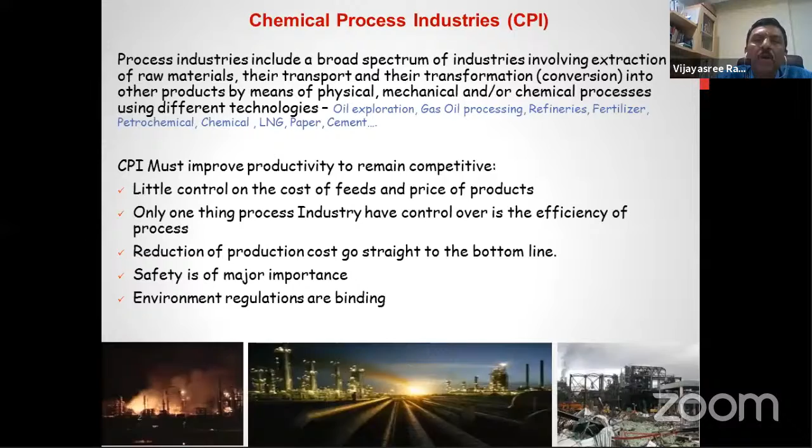Now, the challenges with the management of this kind of chemical process industry are multiple. The chemical plants are becoming more and more complex, especially because of the technology advancements. Basic technology advancements like catalyst development and plant design are improving day by day.

Besides that, automation, as you know, has tremendously grown over a period of time due to the advent of computer technology. Automation is quite directly related to computer advancements. So because of the advancements in computer technology, automation has become very, very complex now.

As you know, even home appliances, like say a washing machine, what you bought 10 years back and today is quite different. There are more options now, more sophistication, and more trip systems are involved in home appliances also.

So in a big plant or a chemical process industry, the complexity due to automation and safety systems has become very, very high. Because of that, the plant has become more complex. This is one big challenge.

The companies also bring new processes, new technologies and products to the market very, very quickly. The changes are very rapid today. If you don't change yourself, you become obsolete and you are out of the market. So you have to keep upgrading yourself all the time and also produce new products as per the demand of the market. So this is the current situation.

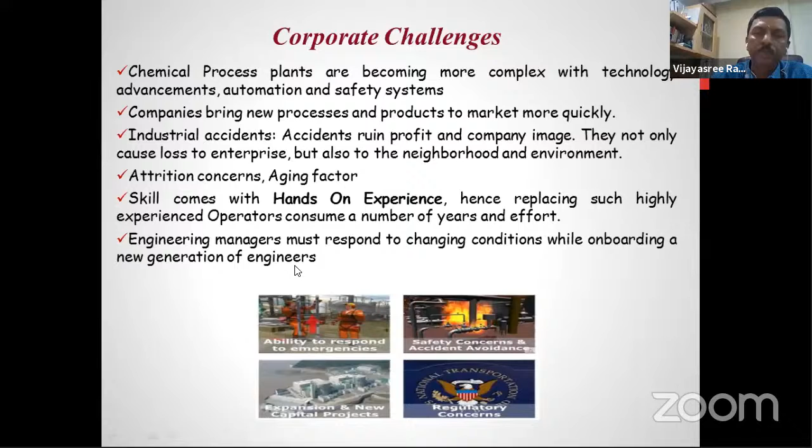And obviously, when there are challenges, you also have an opportunity. So let us see what can be done. Here really comes the analytical capability, analytical techniques like simulation, which can be very much used to address many such challenges, problems and issues that you face in a chemical process industry. So our topic will be about simulation.

Okay, now let me just define what is a simulation. You might already know about it, but just for the sake of continuity. So simulation is basically an imitation of the real world, real equipment or a real plant. That is called simulation. So it's basically used to design, develop, analyze, and optimize technical processes such as chemical plant processes, environmental systems, power stations, and so on. So it has got a lot of applications.

A simple example for simulation is a video game. All of us are familiar with the video game, motorbike, car. We keep playing all the time. So it's basically a simulation of the real equipment. It's not an actual plane, actual car, or actual motorbike. It's just a software which replicates some behavior of that particular process. That's all. But it's very interesting and useful either for entertainment or education.

So if it is a flight simulator, it has got a lot of value because you can teach the pilots how to operate the plane properly, how to start, take off, how to land, how to handle emergency. So it has got a lot of value. If it is a video game, it's entertainment value. So it is not exactly the plant or the car or the motorbike. It is just a simple representation of that particular equipment in a simplified manner. But still, it is quite useful to us.

But in our context, the simulation model is the same. It is only the software which represents a particular plant or a process. So that is basically the simulation model. We will define more detail about the simulation model in the subsequent slide. So we can categorize simulation into three types mainly.

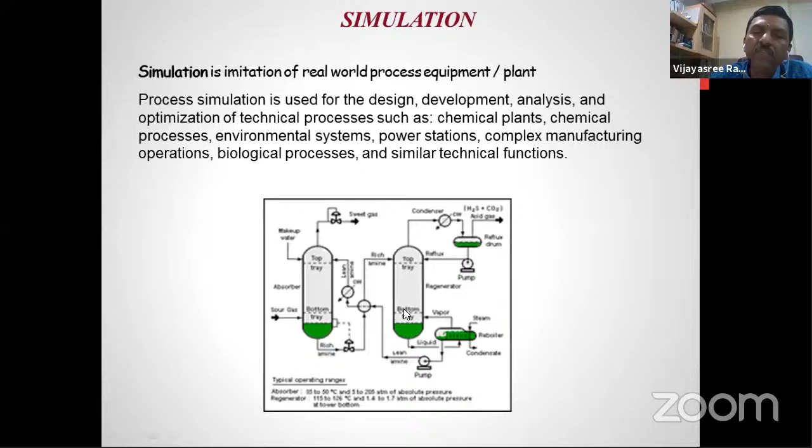Streams are pipelines. So if you see here, there are multiple equipment. There is the distillation column. There are heat exchangers. Again, there is a distillation column. Then there is a reboiler. There is an accumulator in the top and so on. And all these are streams which are connecting the various equipment. Basically, steady state simulation is a representation of this situation.

And this simulation is ultimately a software which is solving the mass and energy balance coupled with the phase equilibrium and transport and chemical reaction kinetics of a system. That's basically the simulation model. We will see a little more detail about this mass balance and all that in our next slide.

So for steady state simulation, you would already be knowing the names Aspen, HYSYS. Some of you would have already used them in your college or you would have heard about this terminology. There are other software like ChemCAD, DWSim. There are many steady state simulation software widely used in the market by industry as well as by academic institutes.

Okay, now again, this steady state simulation has got a lot of applications, but it's not everything. Steady state simulation has some limitations, and therefore we need a better methodology of simulation, which we call dynamic simulation. So dynamic simulation is an extension of the steady state simulator, an advanced activity that integrates in the same environment design, operation, and control. Benefits include predicting design limitations over a wide range of operating envelope, overall validation of design performance, operability and safety.

Basically, dynamic simulation, as the name suggests, is dynamic in nature. Steady state, as the name suggests, is steady in nature. That means the steady state simulation will give a result when the system becomes steady. For example, if I have a distillation column, I put some feed into it, I'll get product. But this product you will not get instantaneously. It will take quite a long time. It has to fill up all the trays in the distillation column. Finally, it has to come out as top product and bottom product. It will take time. So time is a very, very important aspect.

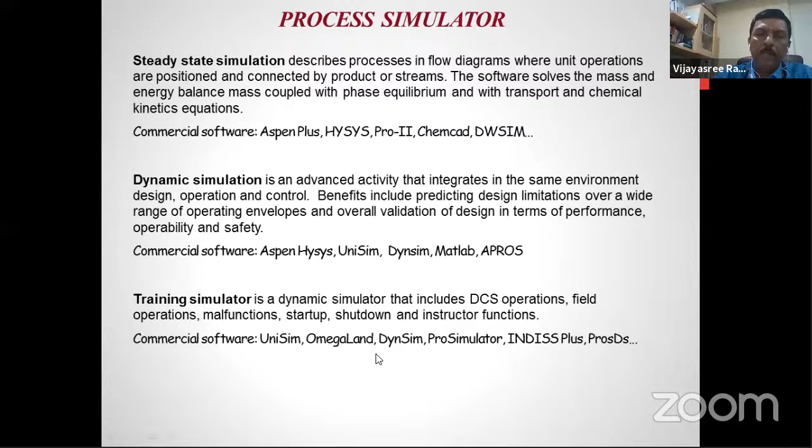Okay, now if you take a plant, you go to a refinery or a gas plant or a fertilizer plant, there are many activities happening in the plant. Now, when I want to construct a new refinery or a new fertilizer plant or a new LNG plant, anything new, initially you have to design. That's the first activity. In design, there are multiple stages, 3 stages of design. The first stage is conceptual design.

Suppose I want to build a new refinery. Today, CPCL is going to build a new refinery at Nagapattinam, I think a 9 million ton refinery. Right now it is at the conceptual stage. Conceptual stage means I know what products are demanded by my market, and I know what crude I'm going to process. Now I have to come out with the overall configuration of the refinery. What are the plants I will have in my refinery? What is the capacity of each plant? That is the overall conceptual design I have to first do.

This conceptual design will be the first step, where you find the optimal design through fast evaluation of design alternatives with flexible specification and continuous solving, based on the product demand and feed availability. If I am designing a refinery in a very cold region, let's say Kashmir, the design will be different. If I'm putting it in a very hot place, maybe Chennai, the design will be different. So based on the ambient temperature, availability of raw material, feedstock, and product demand, this broad conceptual design will be done by the technology licensors.

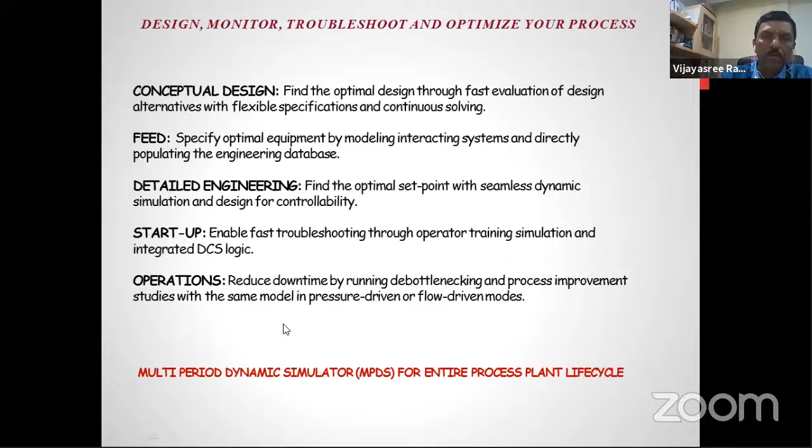The dynamic simulation we will talk about is a multi-period dynamic simulator, and we use a simulator for all these aspects of the plant requirement. We use steady state simulation for conceptual design and FEED. Then we use the dynamic simulator for detail engineering, startup, and operation improvements. This is how we apply it. So I will just go to the next slide.

Now, this simulation model is built based on the fundamental principles of engineering you are taught in college, like heat balance, mass balance, reaction kinetics, phase equilibrium. Take any equipment, a heat exchanger, for example. All of us are aware that a heat exchanger has two sides: a hot side and a cold side. First, material balance is very important. On the hot side, whatever I'm putting inside should come out; the material should balance. Similarly on the cold side, whatever is input is going to be output. That is the mass balance.

For heat balance, the hot side heat should balance with the cold side. So you have equations like m Cp ΔT = Q = U A ΔT. That is basically the heat and mass balance for a heat exchanger. Suppose I have a distillation column, then I have trays. In each tray, you have vaporization happening. The liquid we are putting inside will become partly vapor and partly liquid. So I have a phase equilibrium between vapor and liquid.

So I need to calculate how much will become vapor, how much will become liquid, what is the vapor composition, what is the liquid composition. This is vapor liquid equilibrium calculation, and that is part of mass transfer calculation, which has to be done wherever there are phase changes. Suppose you have reactors, then reaction kinetics have to be applied, and you have to use the reaction kinetics and thermodynamics laws to model the situation.

So basically, these four, mass balance, heat balance, reaction kinetics, phase equilibrium, will be the governing principles for modeling any equipment or a plant. Now, if it is a dynamic simulator, we have one more complexity called momentum balance, which is nothing but pressure balance. In a plant, as you know, there is a lot of rotating equipment, like pumps and compressors, where fluid is moved from one place to another through the pipeline by increasing the pressure of the fluid by either a pump or compressor. If it is vapor or gas, it is a compressor.

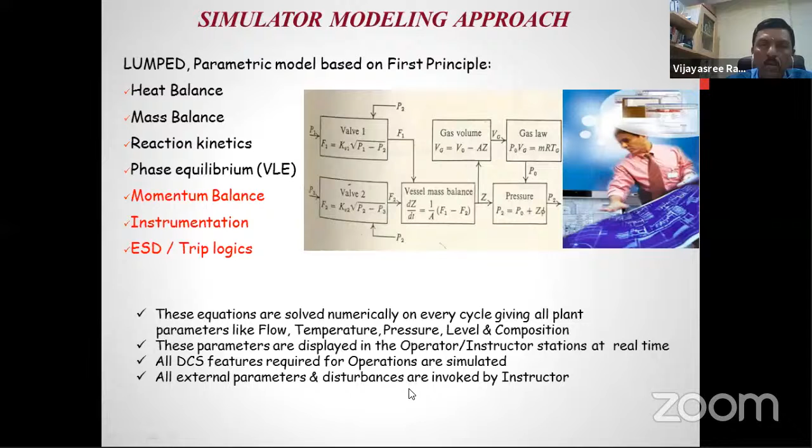Okay. Now this dynamic simulation has got a lot of applications. It can be used for evaluation of new process concepts, safety analysis, integrated plant control design, development of new control strategies, automation testing, automation engineering, performance analysis, training operators and engineers, troubleshooting, and optimization.

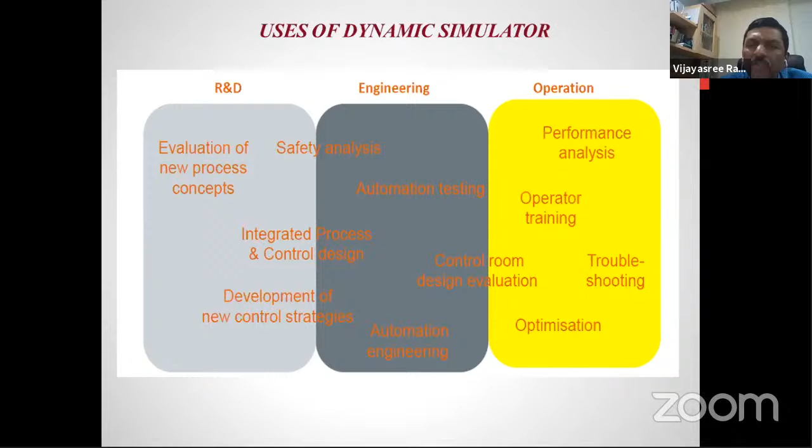So dynamic simulation is used in many applications in the actual plant in today's world, especially because of good computing power availability and advancements in technology. Today's dynamic simulators have got tremendous applications in the real plant. And steady state simulation is also used widely. Both steady state and dynamic simulations are used.

Automation modification, dynamic simulator. Safety analysis, troubleshooting analysis, dynamic simulator. Any optimization you want to do in the plant, both simulators are used. For training, dynamic simulators are used. So basically, both simulators, steady state and dynamic, are very useful, and together they cover all the requirements of the process industry.

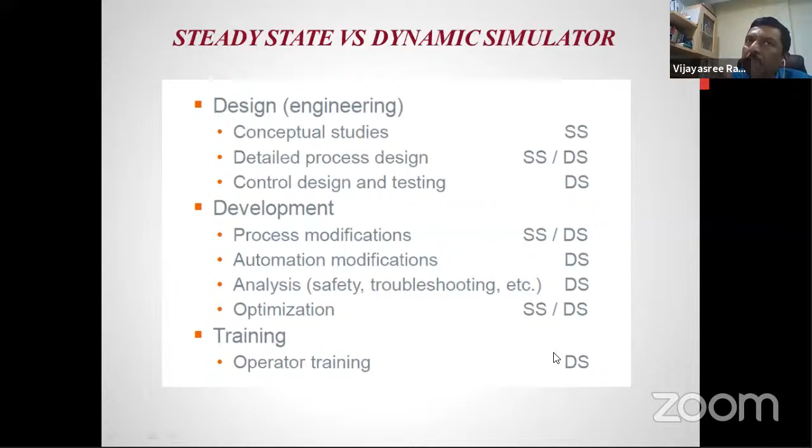This plant could be a power plant, refinery, or a gas plant, any continuous process industry where all the equipment is connected. There is a lot of equipment like distillation, reactors, furnaces, compressors, pumps, heat exchangers. All this equipment is connected by pipeline, and you are putting in some feed and making some products out of it. Lots of streams: vapor streams, gases, liquids, steam. All these are in the pipeline.

Now, the plant is very huge. It may be spread over a few square kilometers. Therefore, as I said, a lot of instrumentation is deployed in the plant. You will measure all the required parameters, putting sensors on the pipelines and equipment, and collect all this data and bring it to the control room.

In the control room, I'll have wiring from the plant to the control room. And in the control room, I have special computers we call DCS, Distributed Control System. In the control room computers, I can monitor the plant on a continuous basis, and I can also operate the plant from these computers. This is how the real world is.

And in the simulation, what we are doing is taking this real plant, which is physical, and modeling it mathematically by the engineering principles of every equipment, converting it into software, and running this software in the computer on a continuous basis. So this simulation model running in the computer represents the plant in a dynamic manner.

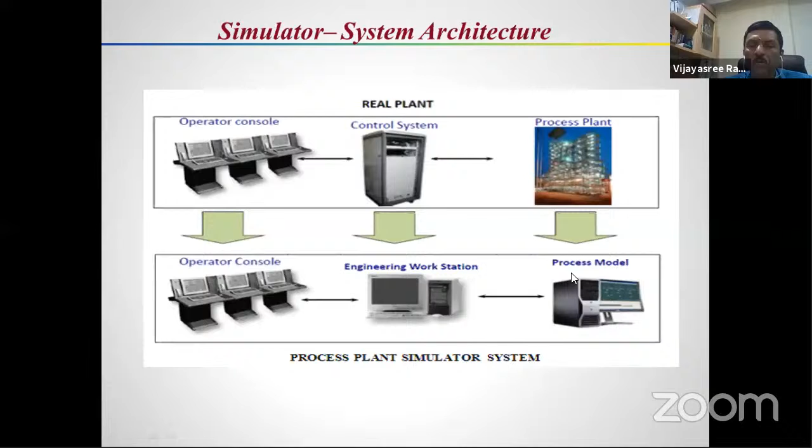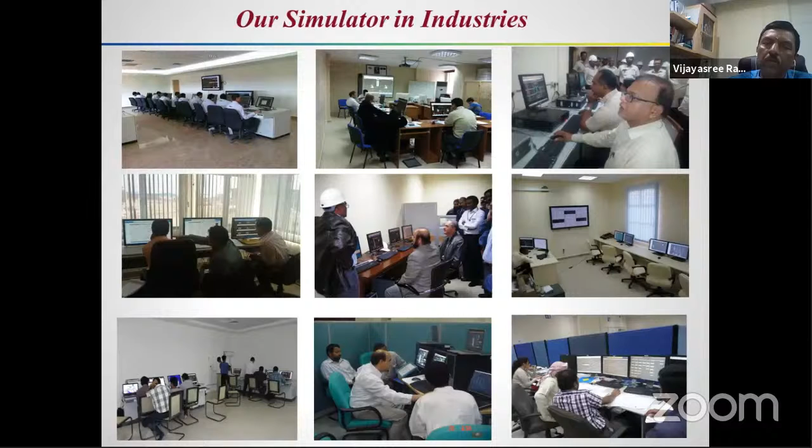So this is just a first presentation section, and I will go to the demonstration. But if there are any questions, of course, I can take it up and answer you also. Meanwhile, I will just load the simulation model. Please tell me whether you are able to see my new screen.

Yes, sir. Okay. Now, I will take an example. If there is any question, you can also ask me anytime, but I will continue because time is also not much. How much time more I have, sir? No, sir, you can take up your own session. No issues. No, but they should not feel sleepy. So I should stop at right time.

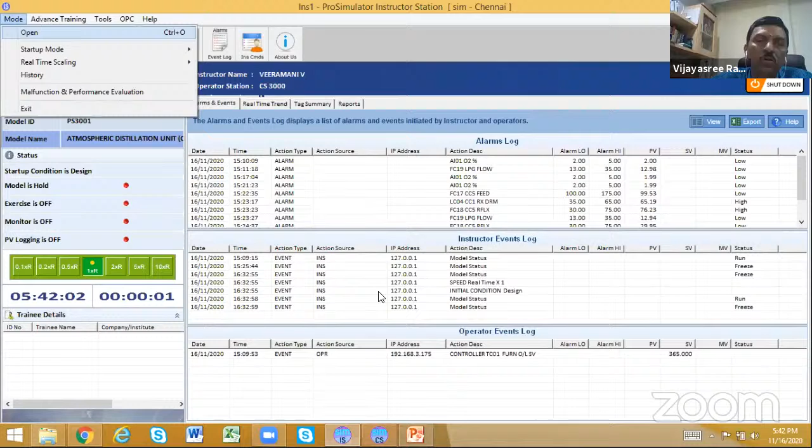That's important. Okay. Now, this is a demonstration I'm going to make of a simulation model, one of the examples we have developed. In our simulator, there are two components: an instructor component and a trainee component. Both are software only. Now, I can select the simulation model which I want to train or demonstrate the user. For example, in a refinery, I want to train the person on crude distillation unit. I select the crude distillation unit model and load the model.

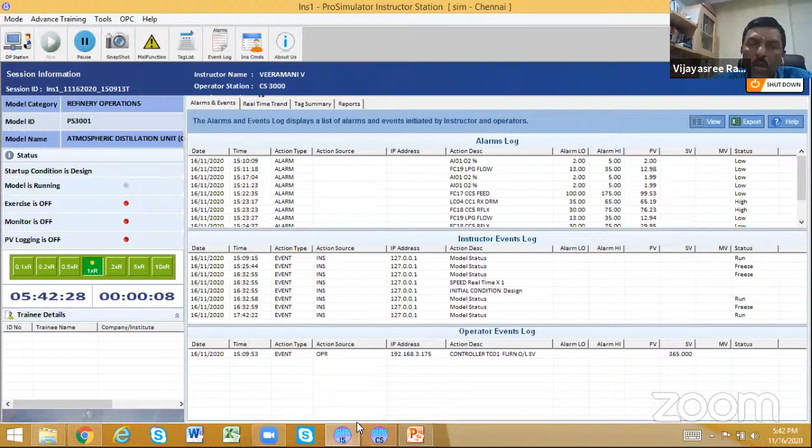Once I load, the simulation model will get loaded. This model means software will get loaded. Now it is running in the background to calculate all the parameters of the crude distillation unit. Now, as a trainee, let us say I am an engineer operating the plant. I want to operate this simulator and learn the operation of the crude distillation unit. How do I do that?

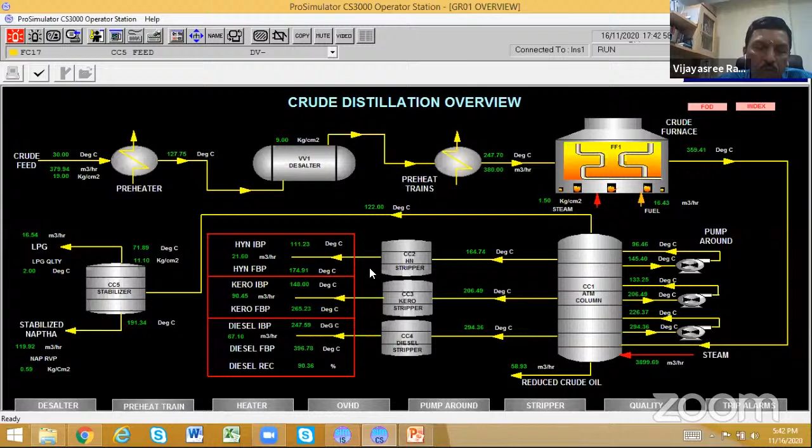So here I have another screen. This screen will be like a control room screen. If you have visited a control room in any process industry, fertilizer, gas plant, refinery, it will look like this. So this is a crude distillation unit, and in this unit there are various sections. Different sections are represented graphically in different pages. I can just keep on changing my page.

And now I'm going to see the crude furnace. This is the furnace equipment, and I have pipelines. See, this is a feed to the furnace, yellow color line. This is crude oil coming through the furnace and getting heated. The purpose of the furnace is to heat up. There are burners here. I'm putting fuel from the bottom and also air, and I'm burning the fuel. Because I'm burning the fuel, the crude oil passing through the tubes will get heated and temperature will be raised.

And how much temperature is raised, you see here, I am measuring various parameters. If I click any of these parameters shown in a box, the temperature is now 360 degrees centigrade. The temperature of the furnace is 360, but the feed temperature coming inside is 247 degrees centigrade. I am raising the temperature to 360 degrees centigrade by putting fuel and air in the burner and burning it.

Similarly, I can see another page. This is the feed first page. I'm taking the crude oil from storage tank and there is a pump here. Because the crude oil storage tank is far off, maybe some 2 kilometers away from the plant, I have a pump to move this crude oil from tank to the plant. So I use a pump, raise the pressure, and then send the crude oil to the plant.

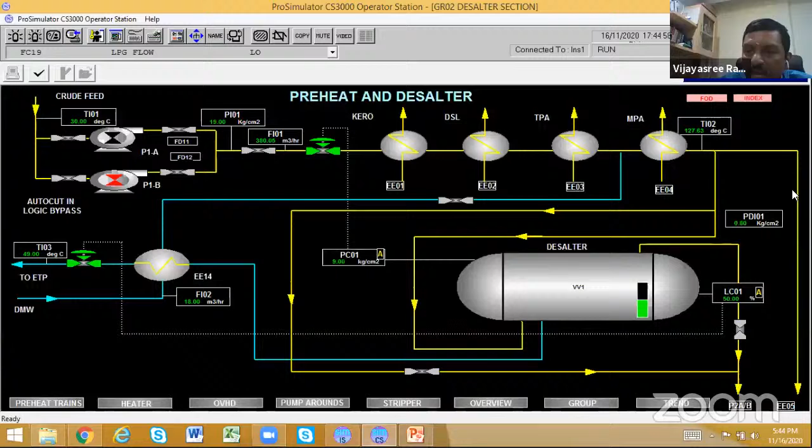The plant has got various heat exchangers where the crude oil will get heated. Then it has got an equipment called desalter to remove the salt. Then the pump will raise the pressure to higher pressure, and then it will go to further heating through various heat exchangers. Then it will go to the furnace where the temperature will be raised. Then it will go to a distillation column where the heated crude oil will get separated into various products.

As you know, in refinery, the crude distillation column will separate the crude oil. Crude oil has got many components in it. It has got LPG, gas, petrol, kerosene, diesel. So many products are in the crude oil.

But I cannot use crude oil as it is. My demand is for LPG, petrol, diesel, kerosene. I want different products. So this distillation column will be used to separate all these products and then sell them as more valuable products. So this is a distillation column.

So here, if you see, a lot of parameters are displayed for you. Temperature in the distillation column. Then it shows what is the level in the bottom of the column. So I can click any parameter, and every parameter is shown to you dynamically. If you watch closely, these parameters will be continuously changing. Small changes will always be appearing.

Say it is now 51.24, 51.21. Slowly it is changing. So like a plant also, nothing will be so steady. There will always be small changes happening all the time. So I can go and make any change. Suppose I want to change the flow rate of some particular fluid.

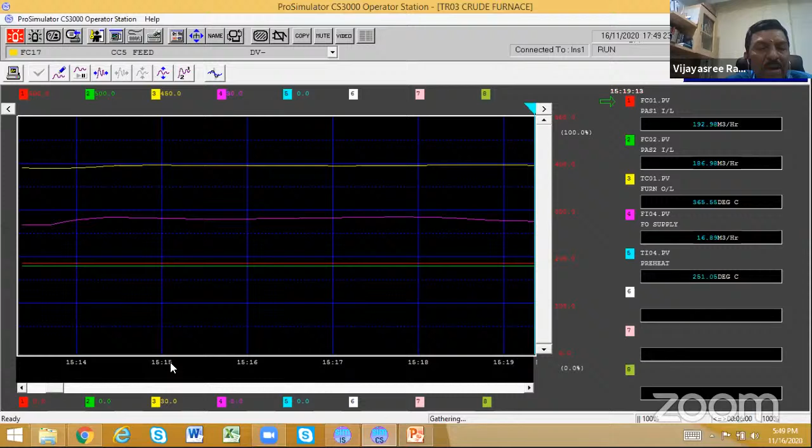So now I can also go to another screen where I can see how the changes are happening. So this is what we call the trend page. Earlier what we saw was a graphics page; graphically, I represent the plant. Here I am showing trend. Trend means the x-axis is the time axis. You see here, this is the time axis: 15:16, 15:17. So time is on the x-axis.

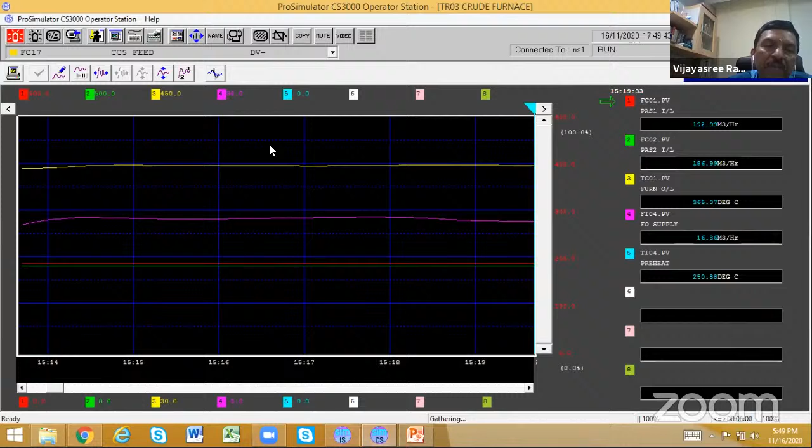The y-axis has different parameters. So I can plot, like you plot any experiment in the lab. Same way you can plot here and see how the changes are happening. If I make one change in one parameter, how are other parameters behaving? Different parameters are shown in different colors. So I can see how the parameters are interacting with each other as a function of time.

Now I can make a small change or a big change. For example, I made a temperature change. I can also make a huge change.

For example, from the instructor, I can give a malfunction. I can say suddenly, say, failure of some equipment. Say I say booster pump failure. This is a very important pump. If I fail this pump, see, this is the pump I'm failing. I stop this pump. Because I stop this pump, crude oil will not be flowing now. The crude oil flow will go to zero to the furnace.

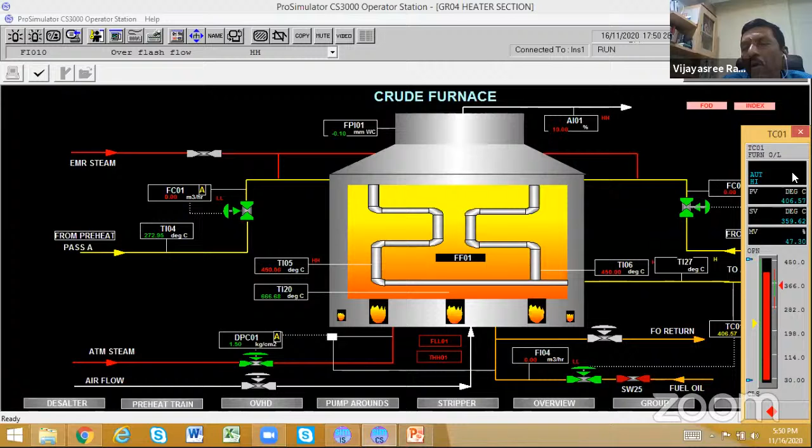If crude oil flow becomes zero, you will see the temperature of the furnace will shoot up. It's gone to 400 degrees and it's gone into red. And you will have a lot of alarms coming now. So many alarms will be coming. In fact, you will also have a buzzer sound, and it's not now sounding because it will disturb. Otherwise, you will have a lot of buzzers coming in. Because I stopped the crude oil flow, the temperature has gone very high in my furnace. All the parameters will get terribly upset and the plant will totally go into an extreme condition.

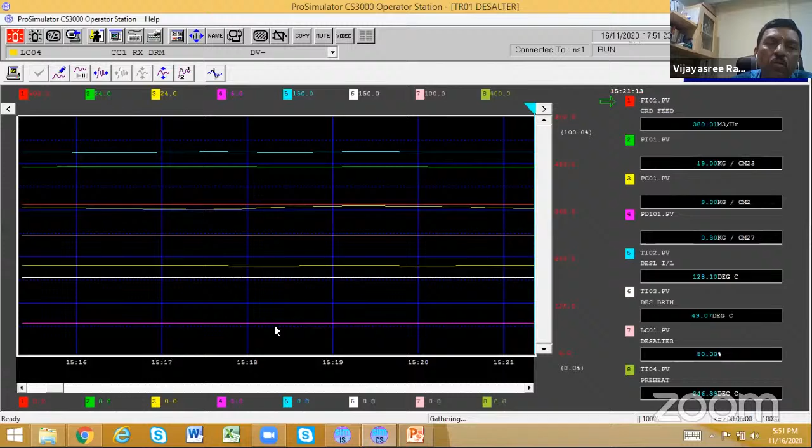So I can make a small change or big change and simulate various conditions and understand the plant behavior very realistically and safely. I cannot do the same thing in the real plant. I cannot stop the pump which is supplying the crude oil to the plant and watch what is happening in the plant. If I do that, I'll be kicked out of the company because you are going to trip the plant. But in the simulator, I can do whatever I like, and I'll be able to see how they are related, how they are correlated to one another, and I'll be able to understand the dynamic behavior of the plant in a very right manner.

So I can do analysis and then I can make a lot of benefit from that. And so this is the main way it can benefit the operators, engineers, designers: how to study and understand the behavior of the plant and the dynamics of the behavior of the plant, and how the safety system is working. All that they can understand very clearly using this simulator.

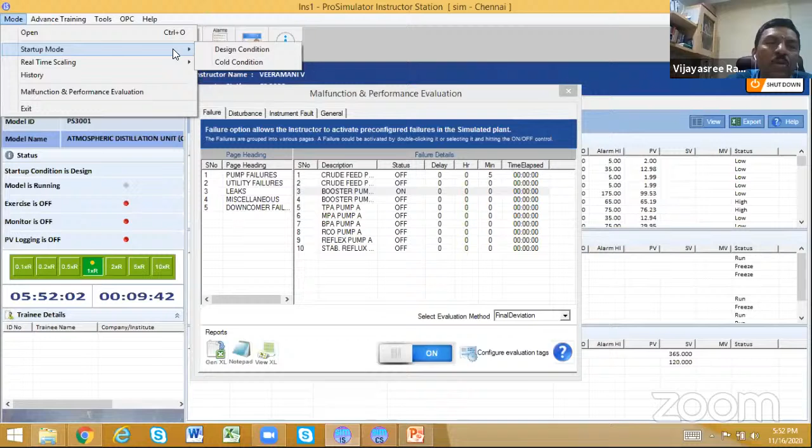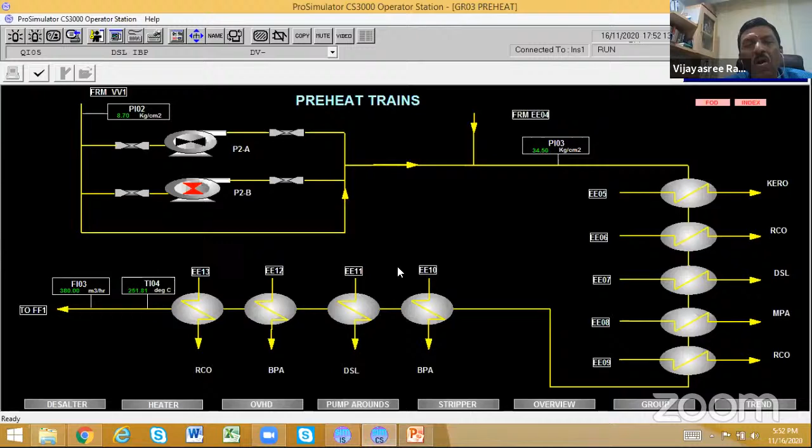Now I made a big change, so the plant is upset. I can just reset and bring the plant into normal condition again. This being a simulation tool, I can reset like a cassette recorder. I can just reset and bring it to normal condition again. See, now everything is normal. So I can always go back to the normal value anytime I like. And now I can make the next change. I can make such experiments.

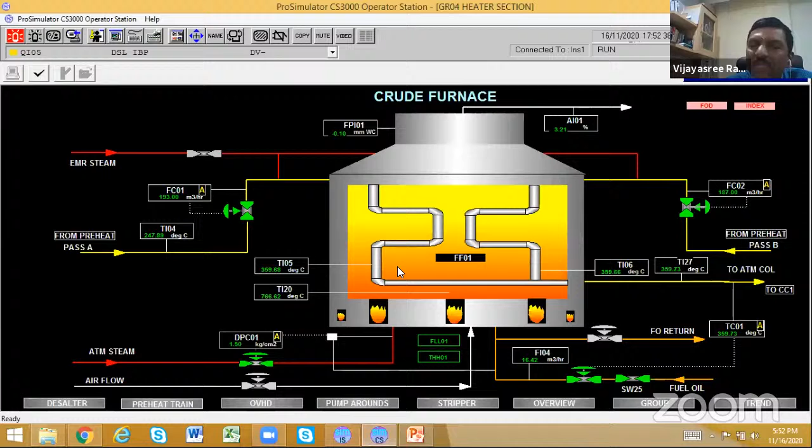Because you make one change, the plant is entirely upset. If I make another change, you will not know which is causing what. In order to understand properly, one by one, you can make a change, get back to the old value and make the change again. So I can really use it as a good tool to learn the dynamics of the plant in a very realistic and safe manner.

What happens normally when you join a plant after your graduation, you need to go through maybe years of training, and only then you understand and slowly get the grip of the plant, and then you will be able to operate the plant. Whereas today you don't have such time. As I said in the initial presentation, attrition is a big concern. Today, people are not staying much. You cannot spend many years of training today. You need to train them in a short period of time very smartly. So the simulator can be extremely useful, because what you learn over a period of 1 or 2 years, you can learn within a few weeks if you sit on the simulator.

And I will get the same feel of operating the plant from the control room. See, what happens is, if you're an operator or engineer operating the plant, not only is your theoretical knowledge important. Theoretical knowledge is a must, no doubt. That is the basic fundamental thing which is required.

Besides theoretical knowledge, you need to have the skills, you need to have the confidence, you should have the reflex, you should know the standard operating procedures, you should be able to communicate properly, you should work with others. So many skills are required to be trained. This simulator is a good platform to impart such skill and capability and confidence on the people who are operating the plant in a very short period of time.

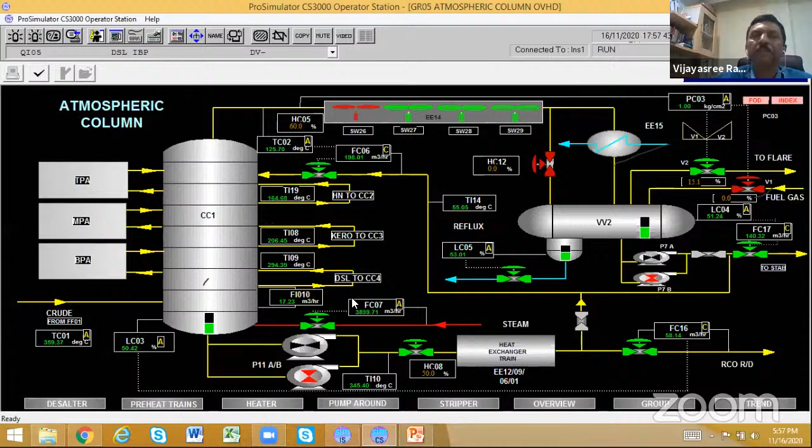Yes, sir. Thank you so much, sir. I think you have given a very nice presentation on the importance of simulation, because theory worked out in the classroom will not carry over when they step inside any industry. So your session has given them practical experience, and before they go to any kind of PLC board, today they have seen how each and every parameter plays a very important role. And as you said, no company can afford to do simulations on the running plant, so they have to do it in the back end. That is what Sim Infosystems is doing a lot.